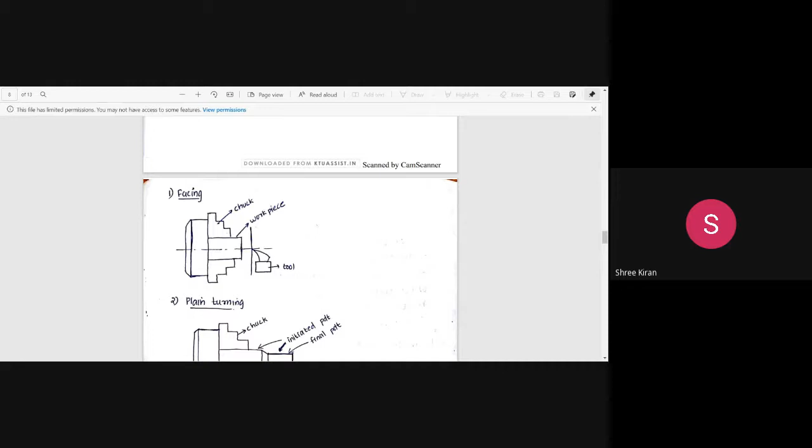These are the various lathe operations we have discussed, and I hope you have drawn the figures like facing, turning, reaming, and all. All the figures were drawn yesterday itself, as I told you. So this comes under the various lathe operations. We had 10 of them, and I hope you have drawn the figures. Soon after that, as time permitted, we left the class. So we will have a brief review of all this today.

Regarding facing: as you have seen in the figure, we have a chuck, the workpiece, and the tool. So what is facing? Facing is a machining operation of the face of the workpiece to make it flat. Mainly, facing is machining of the face of the workpiece, always used to make it flat. It is also called squaring.

The workpiece held in the chuck is rotated. Here we see the workpiece. The workpiece is always rotated in the chuck. This is the chuck. We have a 2-jaw chuck, 3-jaw chuck, 4-jaw chuck, and magnetic chuck. According to the purpose, and according to the width and dimensions of the workpiece, we select the chucks.

So in the case of facing, we have a machining operation of the face of the workpiece to make it flat, and it is also called squaring. Here the workpiece is held in the chuck and it's rotated. Here you see the workpiece. The workpiece is always held in the chuck and it is rotated.

So the facing tool in the tool post is fed perpendicular to the axis of rotation. This is the facing tool. The facing tool is fed perpendicular to the axis of rotation. You see, it is always fed perpendicular, almost 90 degrees to the axis of rotation. This is what happens in the case of facing.

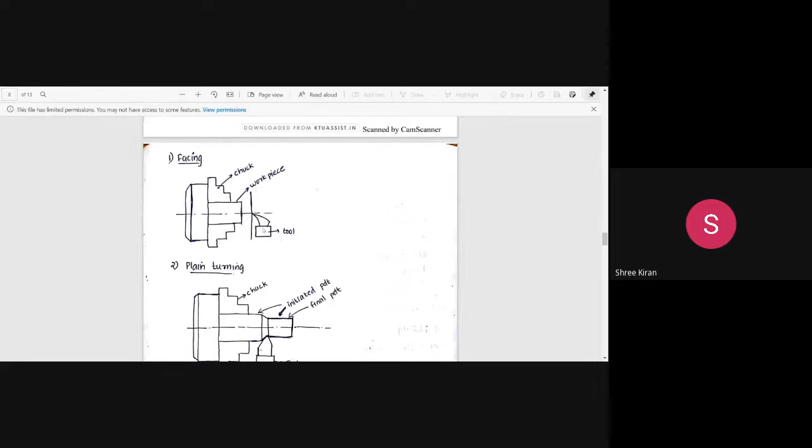The second one is plain turning. So in the case of plain turning, what happens? I hope you have drawn the figure. Plain turning is a lathe operation in which the diameter of a cylindrical job is reduced. In turning, the workpiece is held between the lathe centers or in a chuck. The tool is clamped in the tool post. The workpiece is rotated and the tool is fed parallel to the axis, exactly parallel. That's what happens in plain turning.

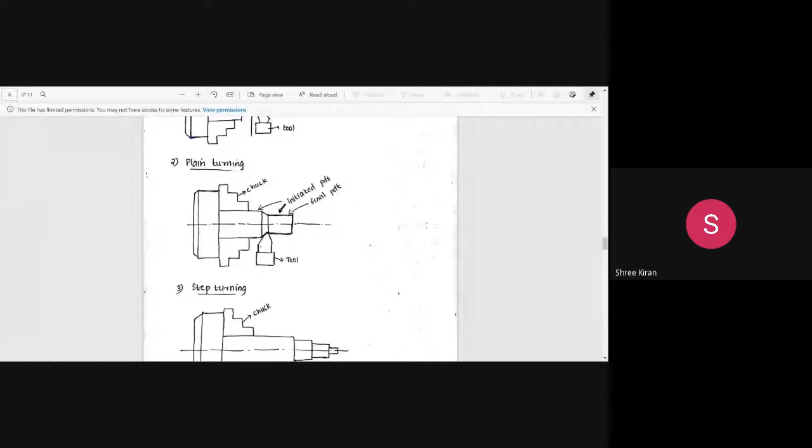And there are various types of turning operations like step turning, eccentric turning, shoulder turning. Step turning is the same, but here it is formed in the form of a step. That's why the tool is almost perpendicular. In the turning operation, the cylindrical job's diameter is reduced, the workpiece is rotated, and the feed is parallel to the axis of rotation. In the turning operation, it is always parallel to the axis. So here we also have a chuck, a jaw, and a workpiece.

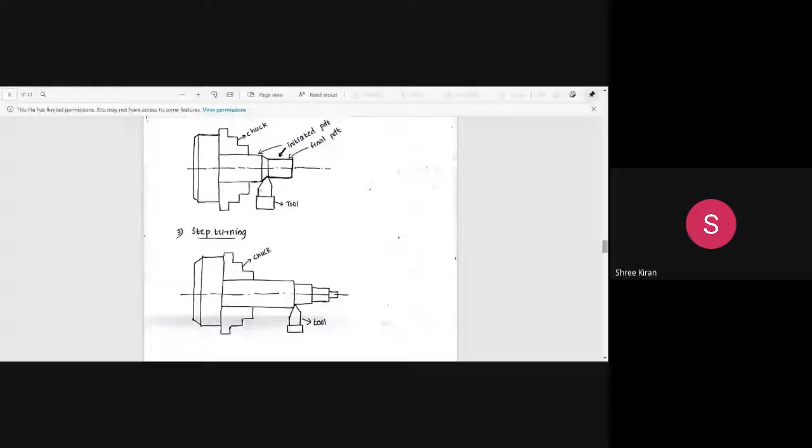Now, besides step turning, we also have eccentric turning. Eccentric turning is useful for turning a crankshaft on a lathe. In taper turning, capital D is the large diameter of the taper, small d is the small diameter of the taper, L is the length of the taper, and alpha is the taper angle. This is what happens in the case of taper turning.

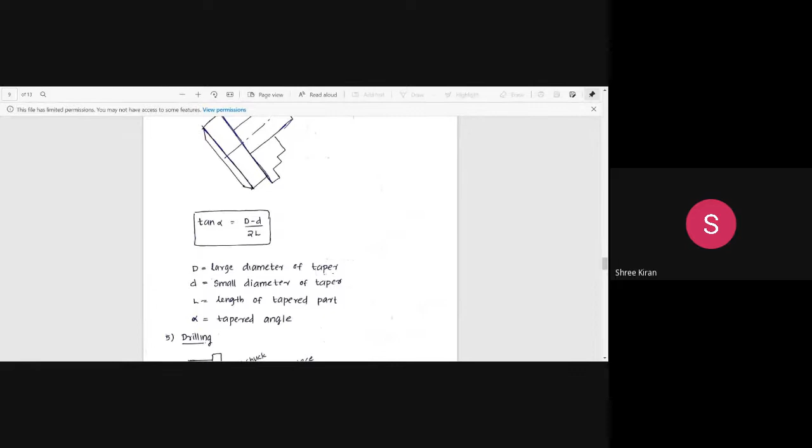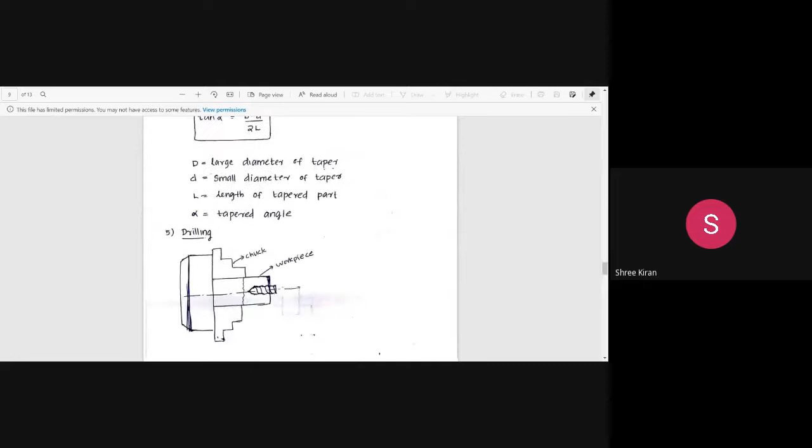Then comes the drilling operation. So we have discussed all this, and the drilling operations, reaming, boring, undercut, threading, knurling, and forming. In the last class, we were discussing chamfering. After taper turning, we discussed drilling operations, then reaming operations, then boring operations, and undercutting.

All this was discussed previously. So after that, we have what is known as chamfering. So what is chamfering? Chamfering is also an operation of beveling or turning the taper end of the workpiece. It is the process of removing burrs after operations such as knurling, turning, and threading.

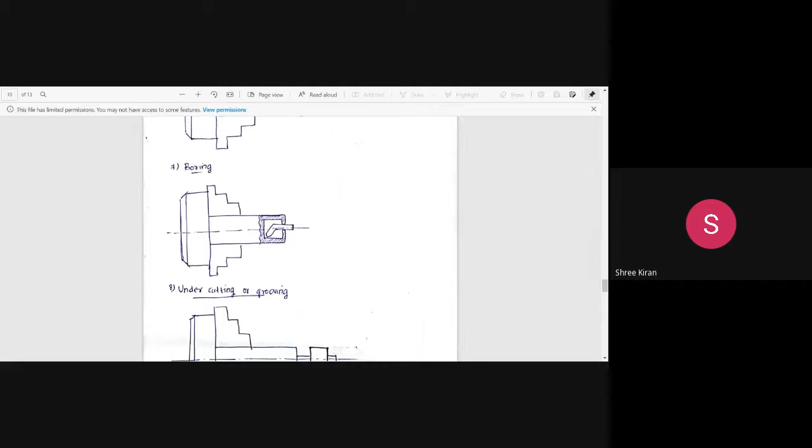Burrs means uneven surfaces or any other surface dislocations. All that will be removed with the help of chamfering. Okay, this is what happens in the case of chamfering. So all this comes into action in the case of chamfering. Okay, so forming and other operations are all happening.

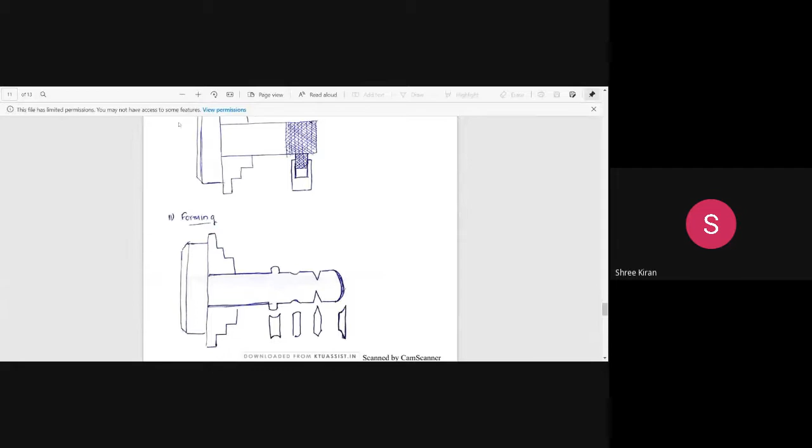Now, everyone, just have an overview in the proper format. Just have an overview of it. So now we will start with the topic known as feed mechanism in lathe. Okay, everyone, Rahul, just take a notebook and write feed mechanism in lathe. Feed mechanism in lathe.

Okay, so what do you mean by feed mechanism? The feed mechanism is where the power is driven to the feed rod from the headstock through the gears. So where is the headstock? We find the headstock over here, where we have a feed mechanism. So the power is given to the feed rod from the headstock through the gears, so the carriage gets linear motion.

In the last class we drew a figure which shows the headstock and everything of the lathe, where we can see the power drive. Here the power drive is given to the feed rod from the headstock through the gears, so that the carriage gets a linear motion. So then what is the carriage? We mentioned it last class. The carriage moves in the linear direction.

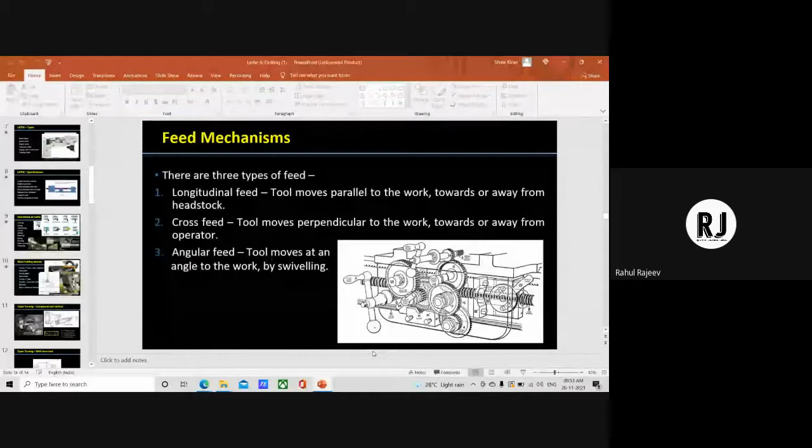Fine. Okay, so this is what we name as a feed mechanism. This is the basic figure. In feed mechanism there are three types, that is longitudinal feed, cross feed, and angular feed. So before going to that, we will have a brief description about the feed mechanism.

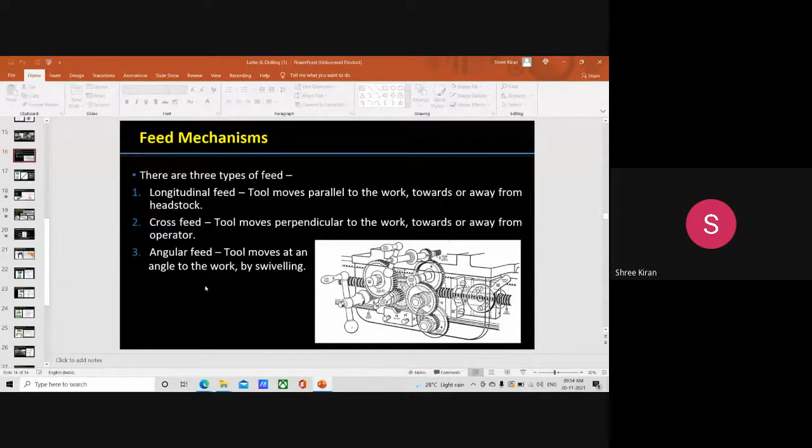So here in the case of feed mechanism, the power is given to the feed rod. You can see here the power is always given to the feed rod. So here we will be having a feed rod. The power is given to the feed rod from the headstock with the help of gears.

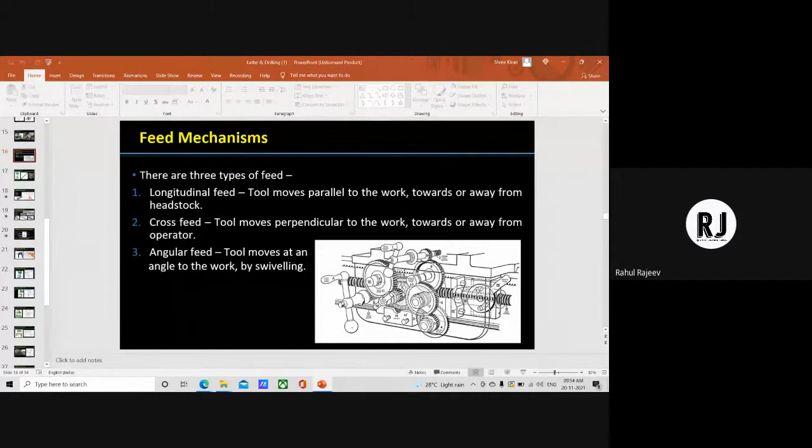What is the purpose of a gear? Rahul, what is the purpose of a gear? Basic purpose. Not Rahul, anyone? Okay, Rahul can say. Sir, to convey motion. To convey motion. What type of motion to what type of motion? Anyone of you, not Rahul, can say. Let me hear the sound.

Okay, so now we will start. Like in the case of automobiles, we have gear. What is the purpose of an automobile to have a gear? Others? Yes, others. What's the automobile gear? What's the purpose of a gear?

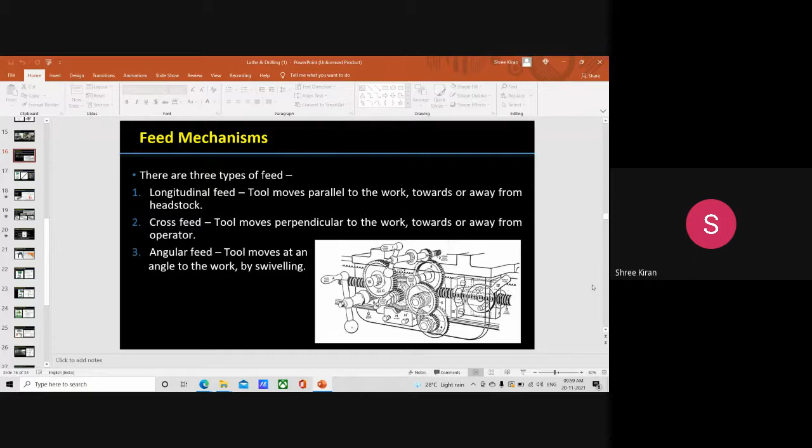And now in the case of a normal gear mechanism, the power is transmitted at a certain or proper rate. In a proper gear mechanism, the power will always be transmitted according to the requirements, like what is the machining aspect, what type of material we are using, what is the thermal aspect, and other aspects. All this comes into the case of feed mechanism. Now you see, this is the drilling machine.

Okay, so this is the drilling machine, and this is the drill bit, used for normal drilling purposes. On the tip of the drill bit, we will always have a diamond tip, in order to have a normal cutting operation.

In order to have a normal cutting operation, we always have a drilling process. Drilling is the main purpose for making a hole. What is the main purpose of drilling, Muhammad Shahzad?

So mainly in the case of a drilling bit or drill machine, we have the operation of producing a cylindrical hole by removing metal with the rotating edge of a cutting tool called the drill. This is what happens in drilling machines.

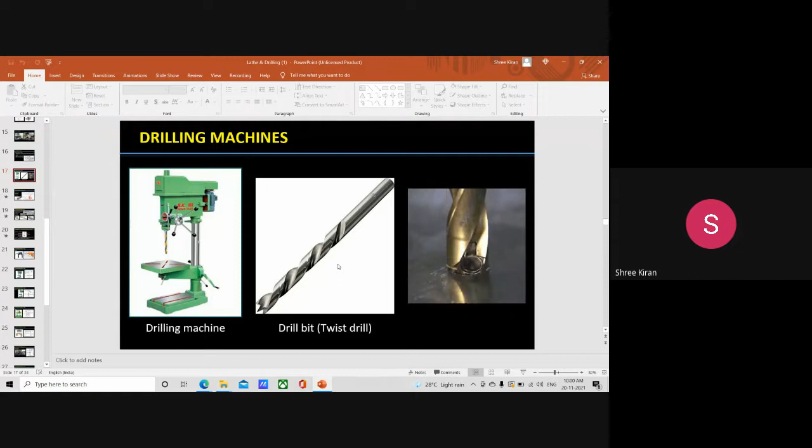We will be mentioning the various types of drilling machines. Now it comes to the twist drill nomenclature, where we have a clearance angle, rake angle, wedge angle, and point angle.

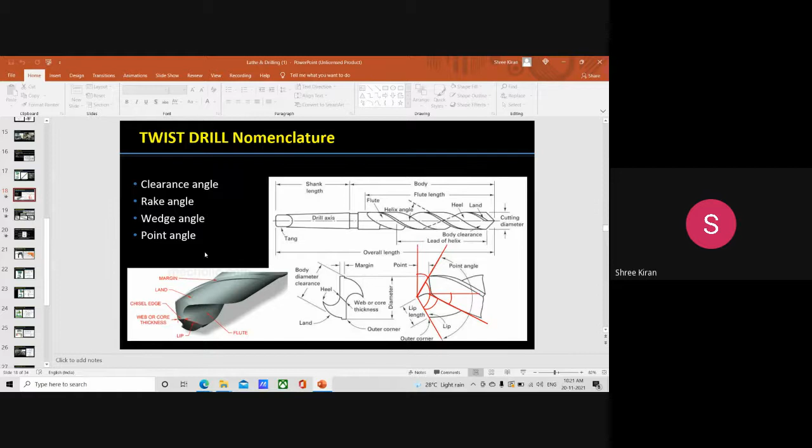Now we will look at the main drilling machine tools. There are various types like twist drill, two cutting edges, straight drills, step drills, subland drills, and core drills. Drilling machine tools include flat and spade drill, twist drill, straight drill, and center drill.

Before that, can any one of you tell me what is a drilling process?

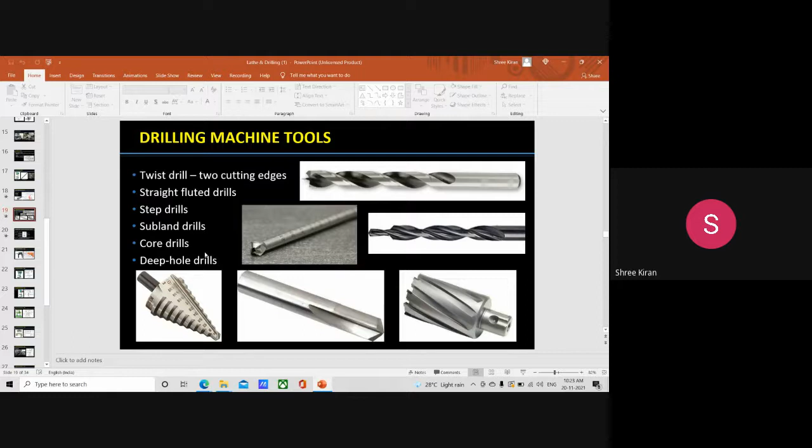Now see, it's a normal drilling machine, where you have a drill bit and the workpiece. Then we have a chuck where we can adjust the drill bit. Then this is the torque selection ring, which means you can adjust the amount of feed rate.

Then we have an on-off trigger where we can switch on the power, then we have a grip, then this is the forward and reverse switch. In the case of a drill bit, the forward and reverse switch can rotate the drill in clockwise or anti-clockwise direction.

This is what happens in the case of a portable drilling machine. The portable drilling machine is a very small and compact machine which can be easily moved from place to place by conveniently holding it by hand. Anyone doing maintenance work, whether electrical or drilling related, will have one. Bosch is the most common name heard, though there are many names according to purpose and requirement. We use various drill bits. The most commonly found drill machine in the market is the portable drilling machine, and we can even use it for local purposes in our household.

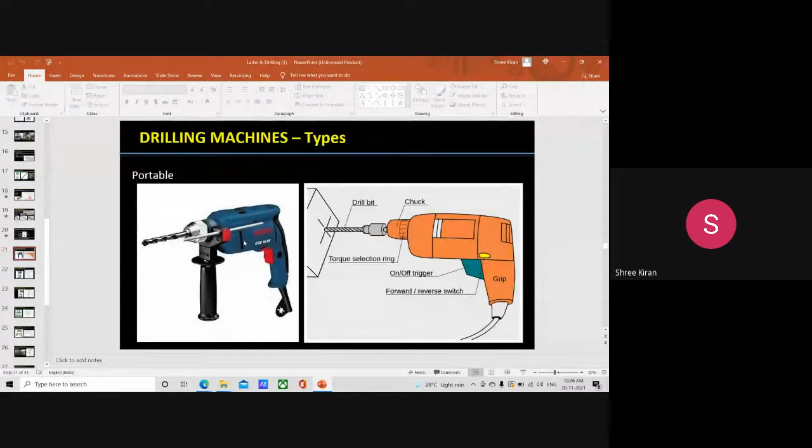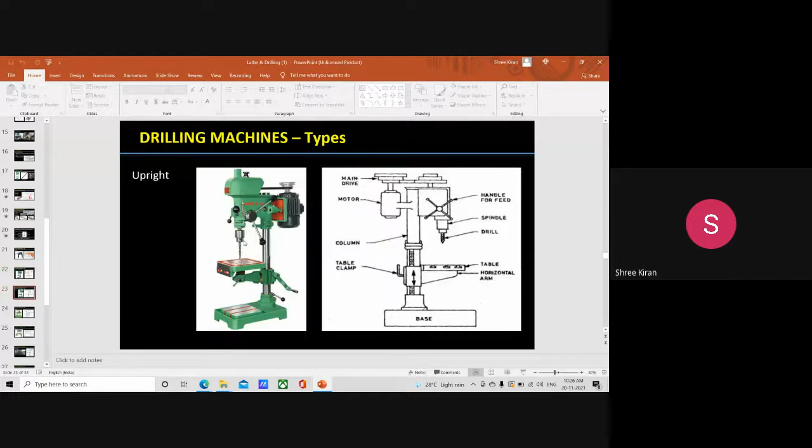Now the types. In the types we have the portable drilling machine, then the sensitive drilling machine, then the bench type of drilling machine. According to the purpose, various drilling machines are available: upright, radial, gang, multiple spindle, deep hole, and so on.

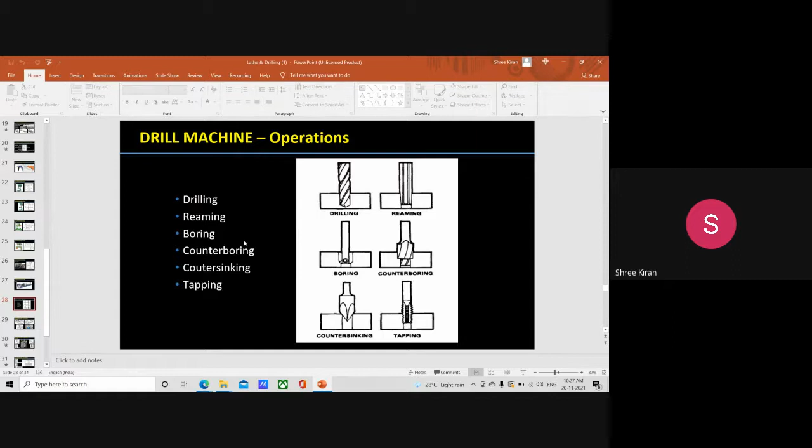I hope you have already noted down all the drilling machine operations like drilling, reaming, boring, counter sinking, and tapping. We noted this down in the last class, right? You can check your notebook. Yes, sir.

So you can see all the parts here. I hope you're seeing all the parts over here. So the base - what is the base's purpose in the case of a drilling machine? The base is a heavy casting made up of cast iron.

The base is always a heavy casting made up of cast iron. It supports the column and the other parts of the machine. This is the base, which is heavy casting made up of cast iron, because it needs to hold these parts. So the base is a heavy casting made up of cast iron, and it mainly supports the column and other parts of a machine. That's what we covered for the base.

Then the upper part we have a column. The column is a vertical upright cylinder part which is firmly attached to the base.